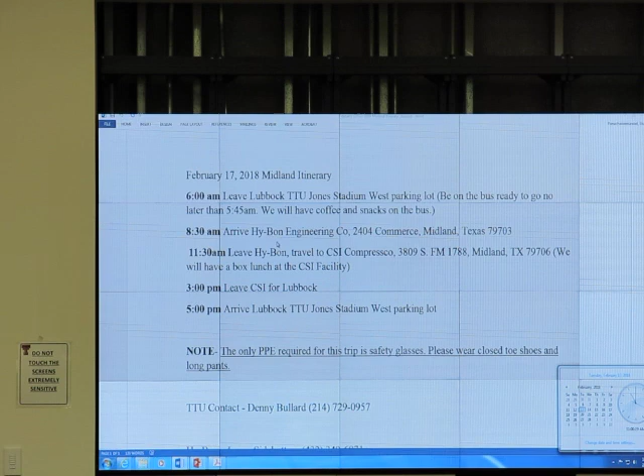Okay, field trip schedule. This coming Saturday at 6 a.m., leave Lubbock from TTU Jones Stadium West parking lot. Be on the bus, ready to go, no later than 5:45. We will have coffee and snacks on the bus.

8:30, arrive at Hy-Bon and have fun for a while. 11:30, leave Hy-Bon, go to CSI. When we reach CSI, we will have...

Mr. Bullard, what is the lunch over there? What do you have, pizza or what? They're Jason's Deli box lunches. And we have a veggie option, right? Vegetarian option. We'll have 3 or 4 options when we get there.

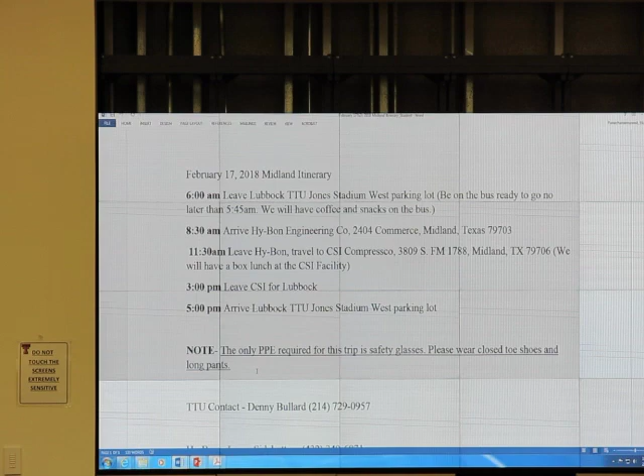And then anyone requiring special dietary needs, I think we will have enough for you. We leave at 3 and arrive at 5. PPE required: safety glasses, closed toe shoes, and long pants. No shorts, and bring your jacket, it can be cold.

If you have any problem, that's a phone number. Question.

Who drives by themselves to that place, or does everyone go with the bus? Then what is our policy on that? We provide a map later on Thursday, but no one should drive by themselves, though some can. Yes, I've had one person ask to drive by himself. We prefer you ride the bus, but if you have extenuating reasons that are really good, solid reasons, talk to me after class.

But we prefer you ride the bus, and you need to be there early. At 6 o'clock we leave. And if we leave and you're not on the bus...

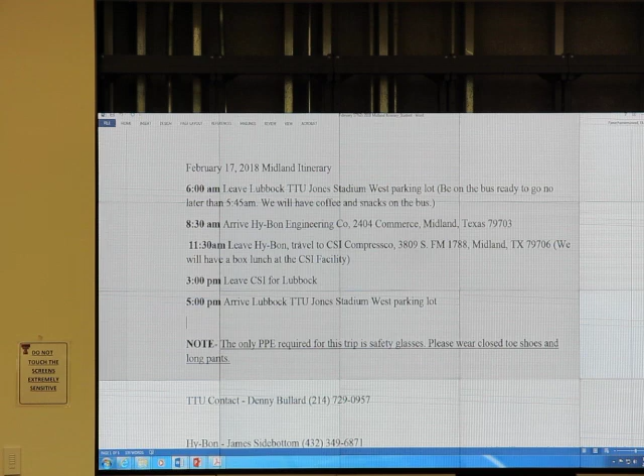Will you drive by yourself or go with the bus for this Saturday trip? I go with the bus. With the bus, okay.

In another class, there were 5 grad students who drove by themselves to Midland for the field trip, but in that course the total number of students was less than 10 people. When they drove, there was a dead deer on the road, and they ran over it. They almost died or something. So for this trip, go with the bus, okay?

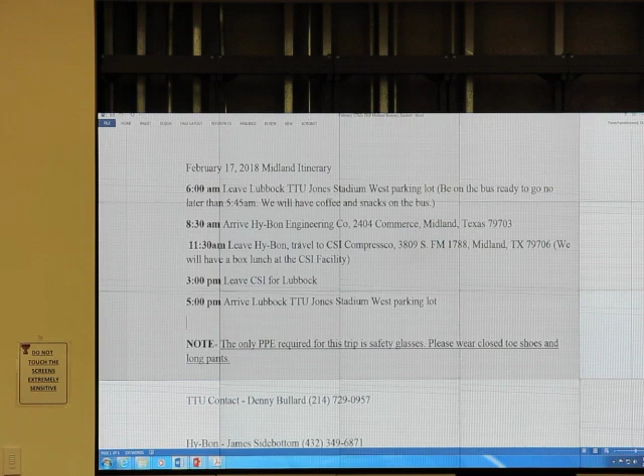And for the missing with university excuse, you... only for field trip. The rest, if you don't have university excuse, you are not allowed to submit the report, okay?

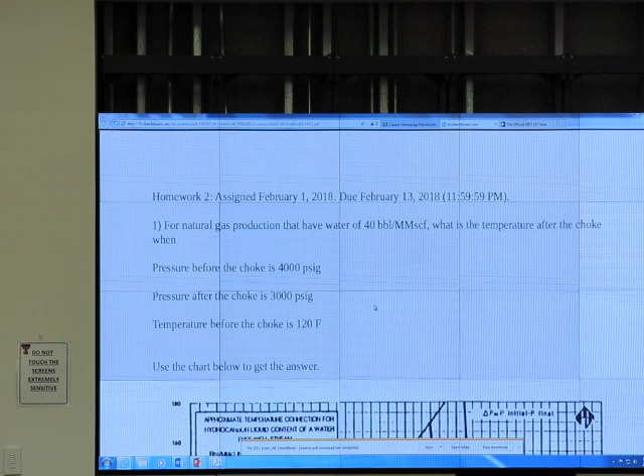And okay, today we are going to go through a little bit of homework, last year's exam, and then we finish a separator and move on.

This coming Thursday, bring a calculator. I announced that on the blackboard, right? Bring a calculator. It is more likely than not that we will have a quiz. We may not have a quiz, but if we have one and you don't have a calculator, that's a problem. Okay?

It is likely that we have a quiz this coming Thursday, and I will tell you the quiz content in a bit. Homework - who hasn't finished it yet? How many of you?

Hasn't finished it. Who finished it already? Okay, so to be fair for those who finished it already, I never extend any deadline, and to be fair to students from last year, I don't extend the deadline.

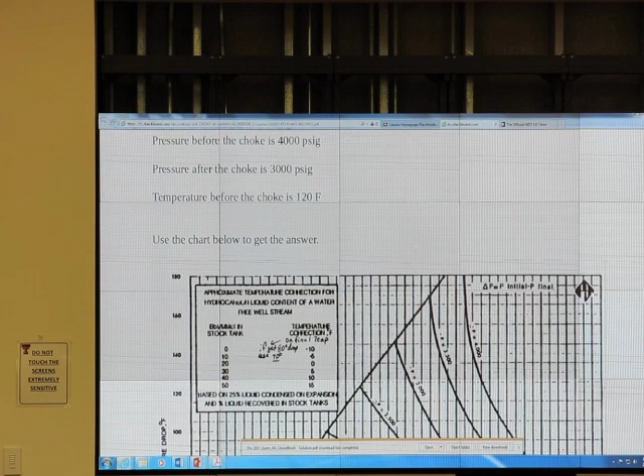I'm well aware that tomorrow is a job fair, and you'll be ready for that. And if you have an interview, bring me a university excuse letter. You can excuse yourself from class, but you submit a report to substitute for that. Good? Okay.

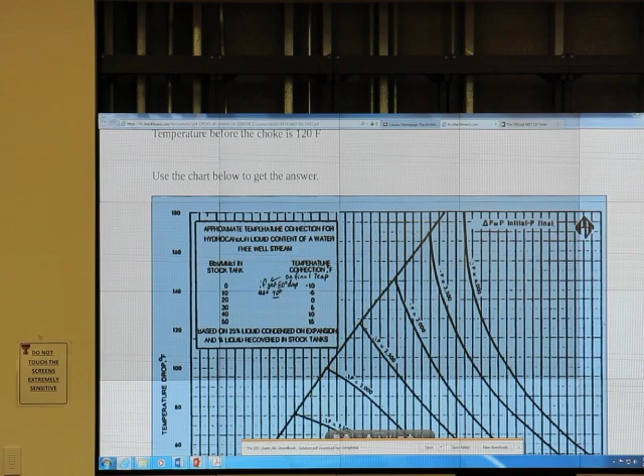One of the homework problems that you may have trouble with - okay, that's homework 2. Homework.

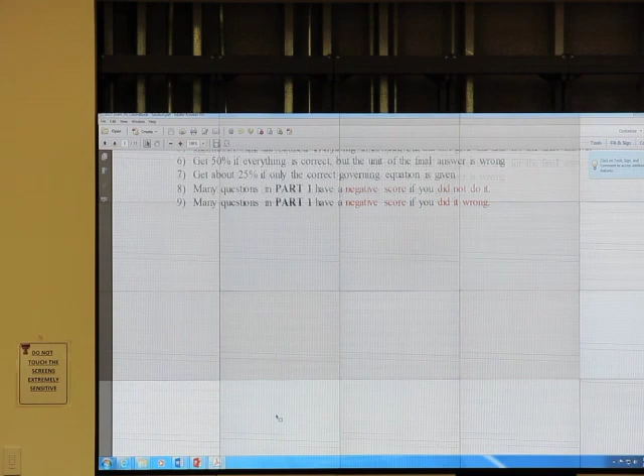Let's go over the exam - last year's exam. Last time I uploaded this. Who hasn't downloaded it yet? It comes with the solution, and I was able to find the solution for 2017. Has everyone downloaded it? Yes. And you can read it all you want.

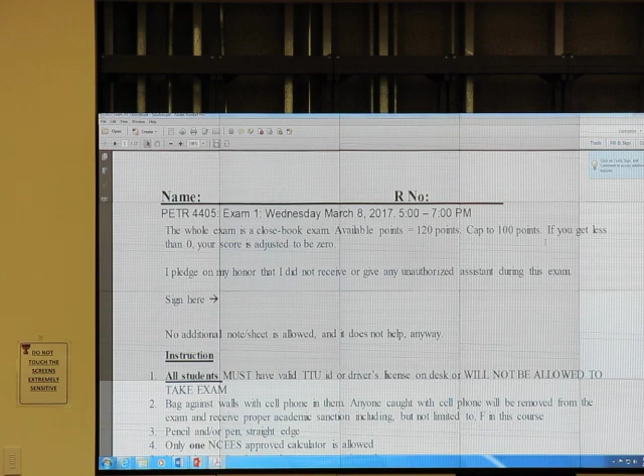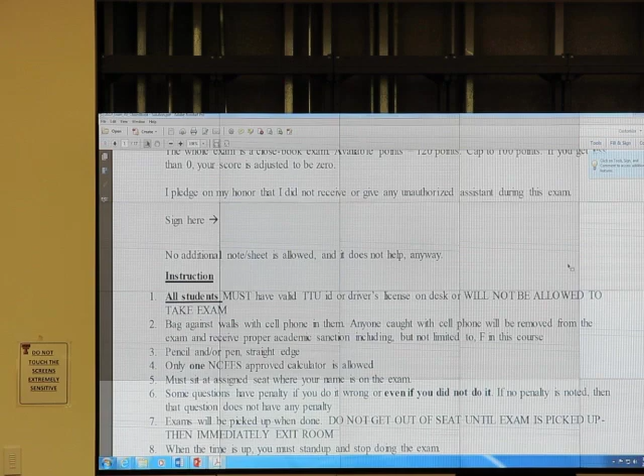Okay, I'm not afraid of it. The new exam should be new, but if it's the same, and it will be new, I will do it - I will do the new one. But if it's the same, you cannot say, hey, the students from this country have more benefit because they have the old exam. Everyone has the old exam, alright, plus the solution.

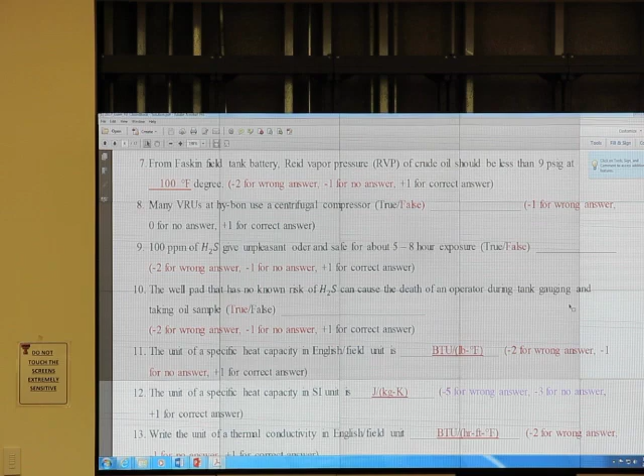Try to do it, okay, to prepare for the exam. There are true/false questions, and separate questions like that. Go through it, okay? And there are calculation questions - I put 3 calculation questions, and this one comes with a solution.

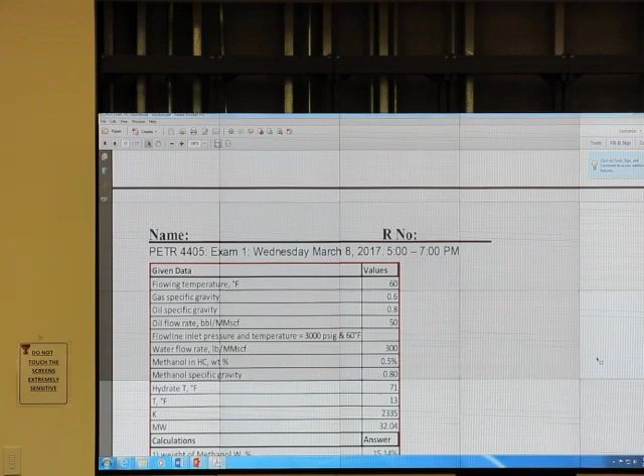If you have a problem, come to office hours with the TA. You know the office hour time, right? Arya Shadi will sit in the TA room upstairs behind the main office. Okay? That's the old exam.

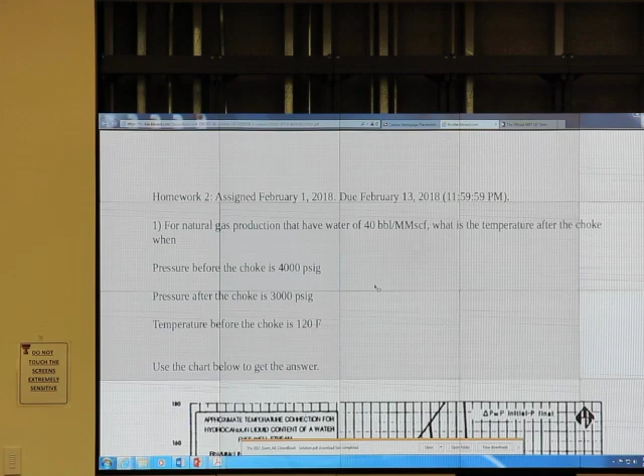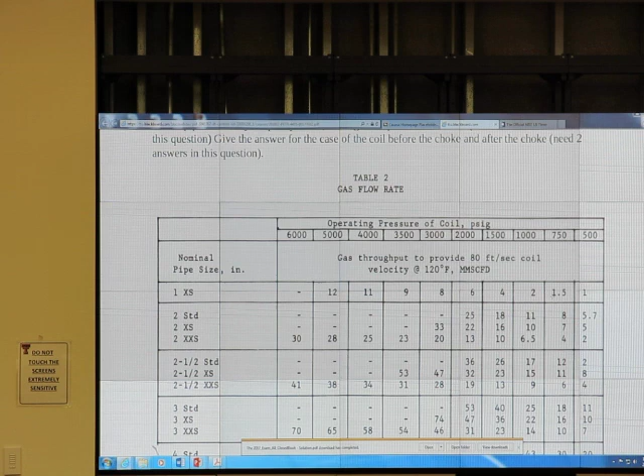Homework 2, question 1, everyone can do that. The one that may not be quite clear is this gas flow rate table. When I do it, I get 13. For the case I selected earlier, I use 2-inch double X. You may use something else. The question here is, this table is for a specific case.

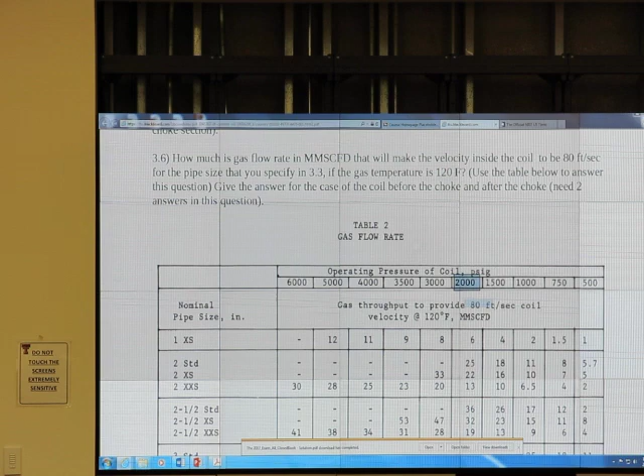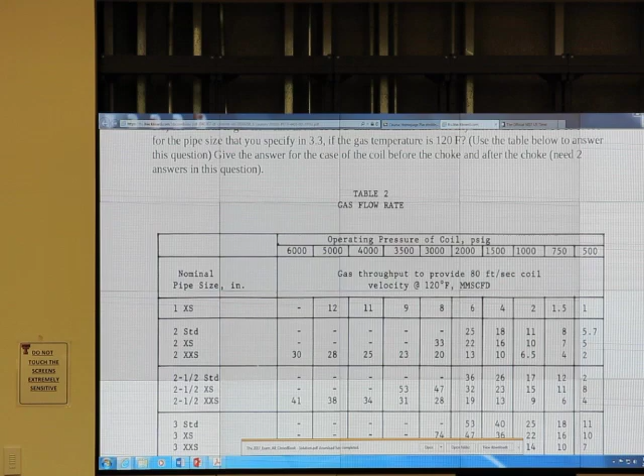This is at 120 Fahrenheit, and the gas throughput is in mmSCFD, so that 13 mmSCFD will make the flow at 2000 psi be 80 feet per second. But if you have 80 F, this number won't remain the same. It will be something else.

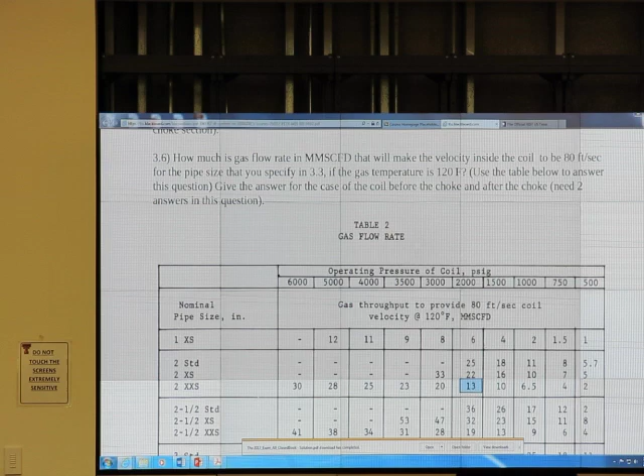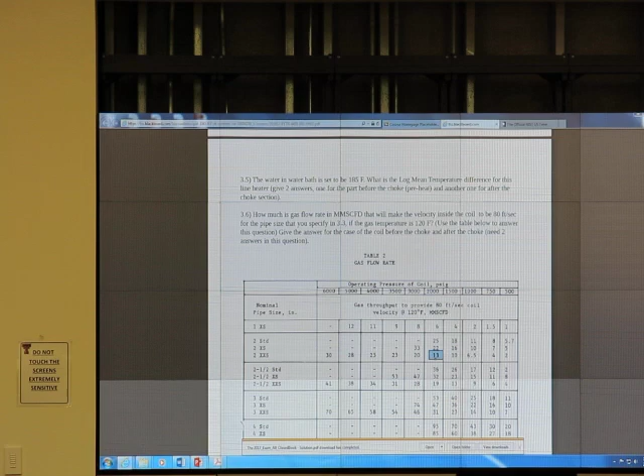If you use the formula given and you use the table, you don't get the same number. I don't think you get the same number. The value from the formula is more accurate, but the table has some assumptions in it. I want you to know it's not the same, it's just not the same. So this is the gas throughput to provide 80 feet per second at 120 F.

It's hot. For the size of 2-inch double X, I can have 13. If the temperature is lower, say instead of 120 it's like 60, what happens? Can I flow more than 13 million standard cubic feet per day in that pipe, or just the same amount?

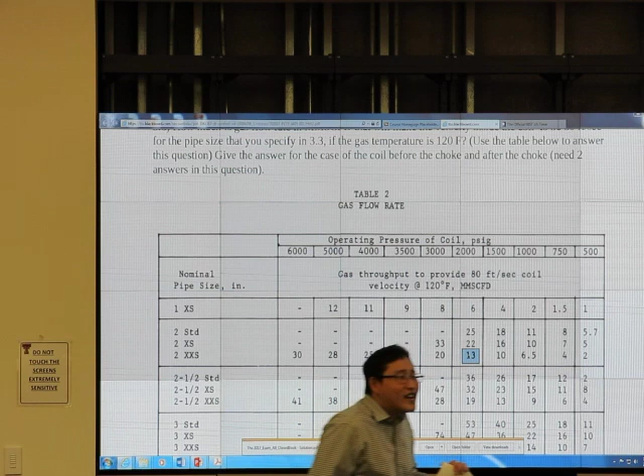More or less? More? Why is that? Because when the temperature is lower... temperature goes down and then? No, it flows less? No, because temperature is lower... so does it flow less, more than 13, or less than 13? Less than 13?

So if 13 makes 80 feet per second at 120 Fahrenheit, if it's just 60 Fahrenheit, can it flow more in the pipe or should it flow less? It should be more. More than 13 or less than 13? More than that, okay, more than 13.

When it is 60, the gas shrinks, right? Gas shrinks. So when gas shrinks, this means you can put more in the pipe so it has the same velocity. To achieve the same 80 feet per second, when gas shrinks already, we should put more gas into it. It depends on how much it shrinks. If it shrinks by 50%, so the volume decreases by half, then you can do 26, right?

Simon, you like 26? If it shrinks by half or something, yes. So if the gas shrinks by half, the volume occupied is just half, then we can put more than 13 mmSCFD. mmSCFD is the volume flow rate at standard condition, it is equivalent to mass flow rate, not quite volume flow rate. Basically one value of mmSCFD gives one value of mass flow rate because it's a volume flow rate defined at standard condition.

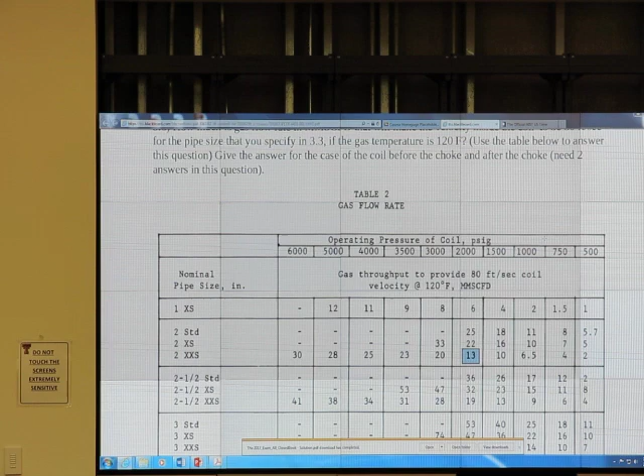Simon, are you good with this? Have you done this question yet? No, that's what I'm doing. Oh, that's what you're doing, okay.

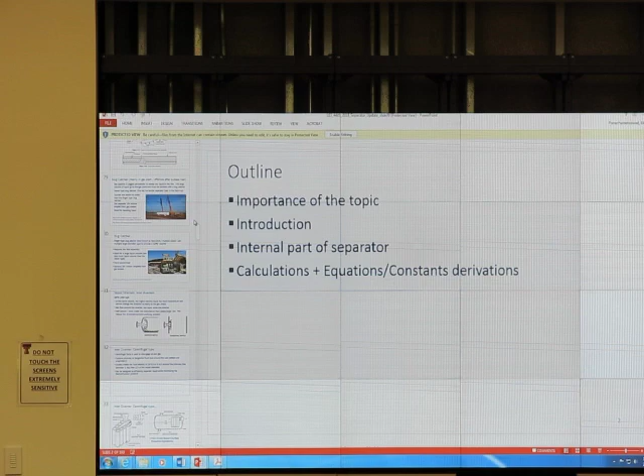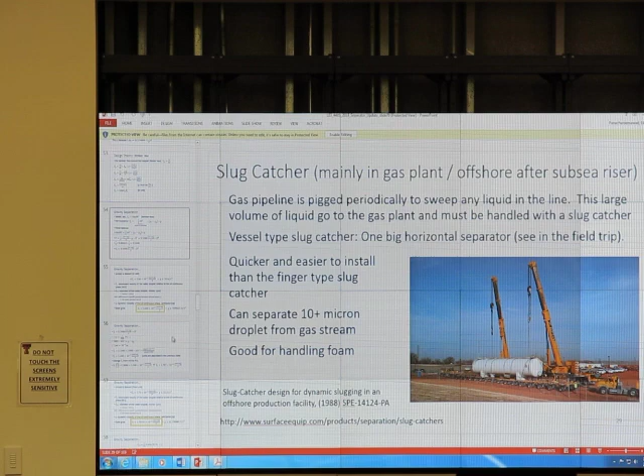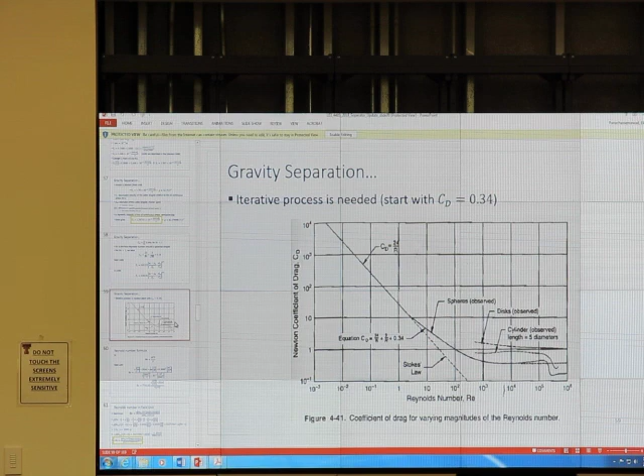Alright, separator. We went over the internal part of the separator, a big separator, slug catcher, a little calculation on the Souders-Brown equation, and VT, the terminal velocity calculation. We went over this.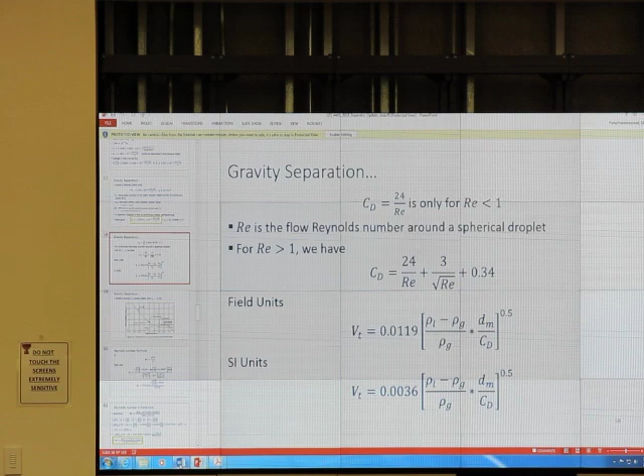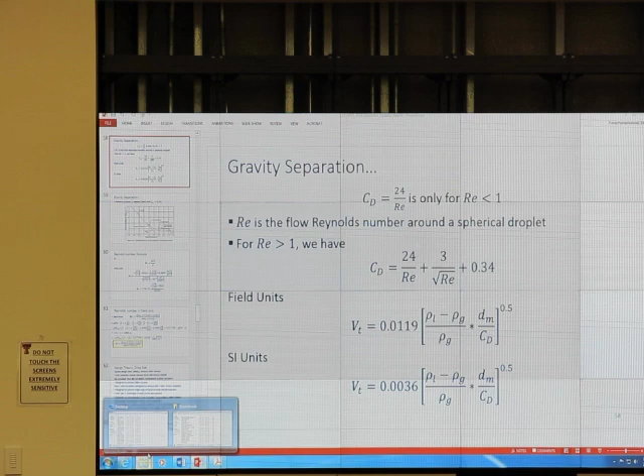In the new homework, you see these two equations. I asked you to derive something, and you will know it for sure because in the homework you're asked to derive some of this constant. That is in the new homework. If you cannot do it, you may come see me.

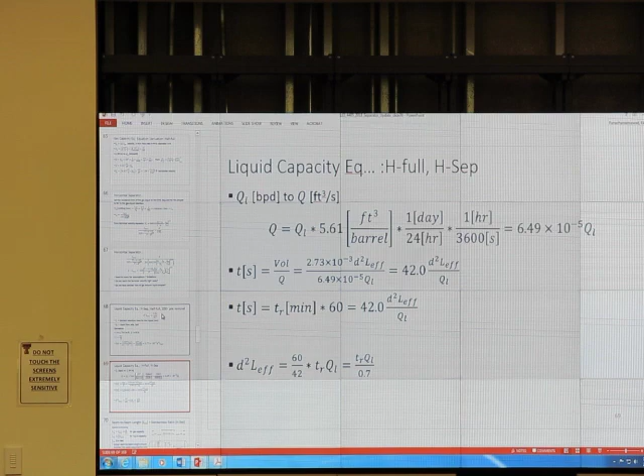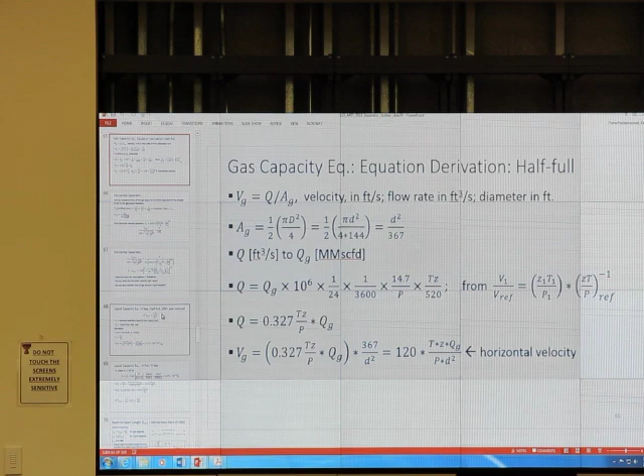The part we haven't done anything about is sizing the separator. I already told you the chart is available, and the reason we don't use the chart is it's just 10% of the time that we don't use the chart. Let's start the calculation.

This slide is about retention time and re-entrainment, which we already went over.

Demi, something, what's your name? Demi what? Yes, you, right hand. Yes, oh me? Yes, yeah, Demi. What's the name of the person next to you? What's his name? Hamza. What? Yeah, what's your name? Hamza. Hamza? Yeah, I will memorize the name.

Hamza, what is the retention time? 30 seconds. No, what is the definition of retention time? Wait a minute. What is the definition of retention time? Average time of a molecule or gas.

So everyone should know the retention time by now, right? So next one we will do the calculation of horizontal separator.

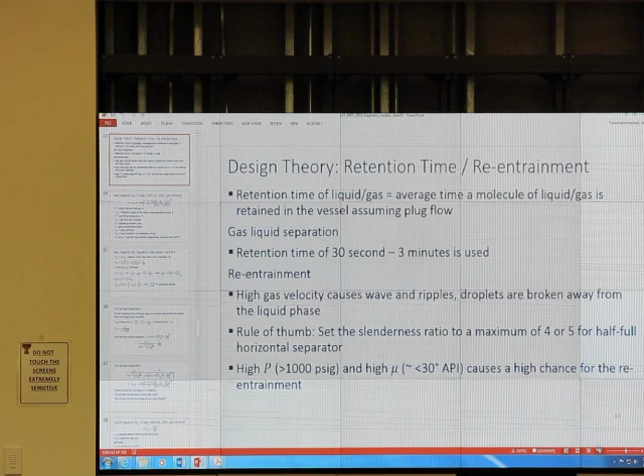And for more information, you buy this book. The calculation is in this book. But for now, I take part of this book and talk about it. Here's the formula for horizontal separator half full.

Okay, the formula is given and we are going to derive it. D is the vessel internal diameter in inch, L effective length, T temperature in Rankine, Q flow rate in mmSCFD, P operating pressure in PSIA, Z compressibility factor, C sub D drag coefficient, D sub M droplet size in micron, and you can read all this, okay?

If we put all this in this unit, we get this equation. You don't memorize the equation, it will be given. To use it, we will talk about it a little bit later, but now we will derive it first.

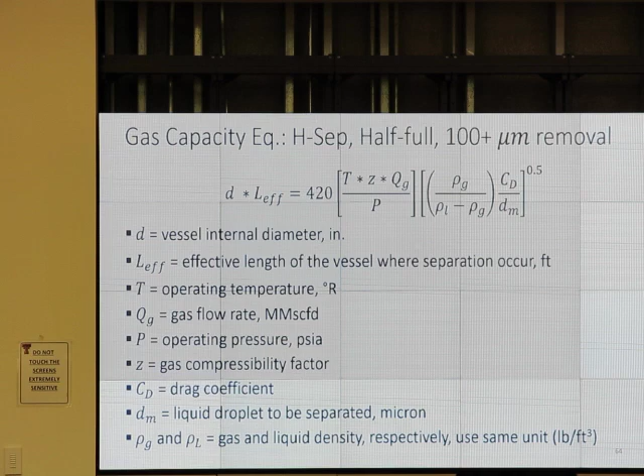Horizontal separator, we derive it based on the concept of retention time that Hamza just answered. Okay, retention time, we use velocity equal to volumetric flow rate divided by cross-section area.

So Q is gas flow rate. If we think about the horizontal separator, from the side view, we have it half full, gas flow on the top. When gas flow on the top, the cross-section area that gas can flow is the top part, right? It's pi d squared over 4 multiplied by 0.5. That's the area for gas to flow.

Flow rate, that is volumetric flow rate, actual volumetric flow rate in the pipe. That is not standard cubic meter. That's not mmSCFD, not standard cubic feet per day. So that's the actual flow rate.

And then we get the actual velocity in the horizontal separator that flows in the top part. So we need to know, when we get this, how fast the molecule will travel horizontally.

Okay, if we have a quiz next time, of course you will need to know the molecular structure of monoethylene glycol, right? MEG. You remember OH, line up, down, up, and then another OH. Got it? That's from the previous lecture. Review it, it is very likely to be on the quiz.

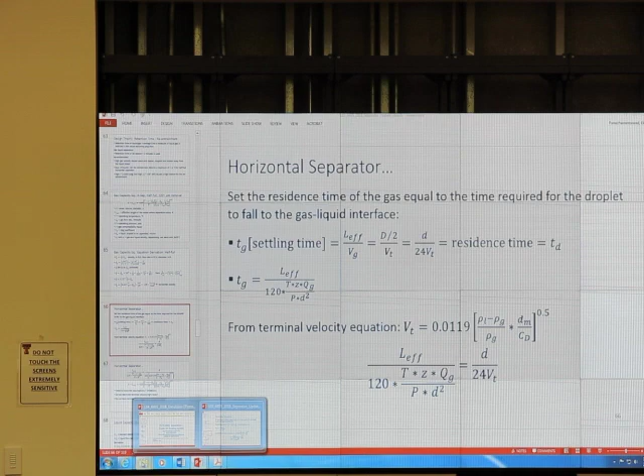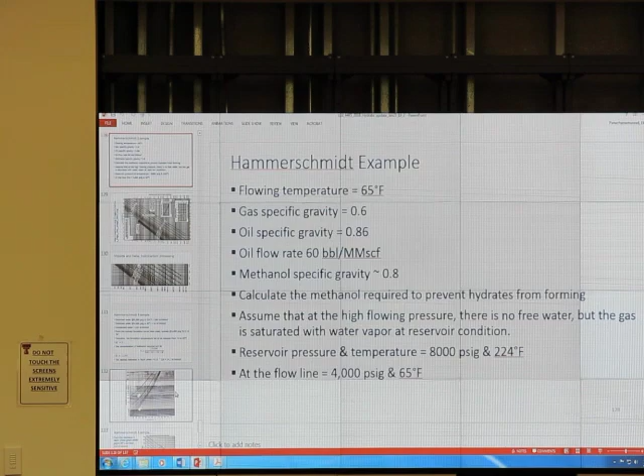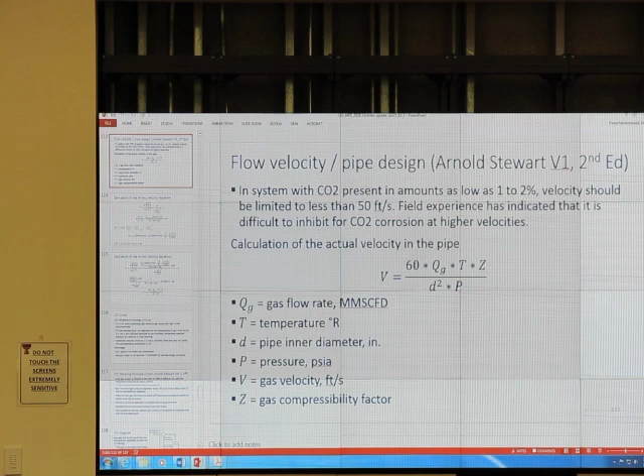I did not print it. When it is a flow in a pipe, when you are asked to calculate the actual velocity of flow in the pipe, the equation is almost the same except the coefficient. Previously it was 60, right? That one was 60, but this time I get 120. Okay, let's show you side by side. That one is 60.

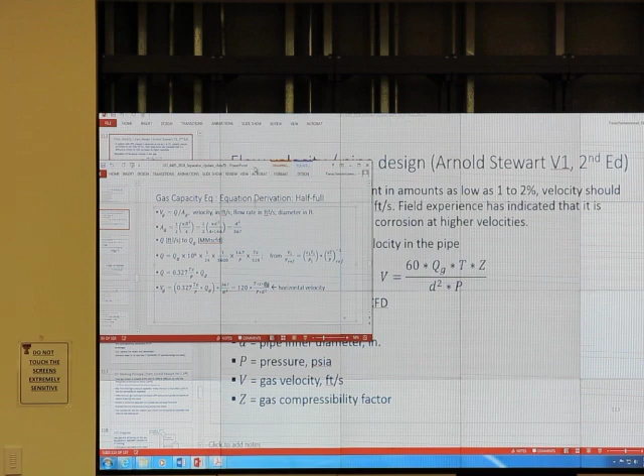And this time I get, that's mine, 120. Okay, 120. Okay, this time I get 120 over there. Why is that? Why do I get 120? Why do I get 120 this time instead of 60? QG the same, right? That's QG and this QG. TZ and that's TZ. D square P, everything the same except the coefficient. Why this time it is 120?

You don't know? Who sits next to you? What's his name? Ahmed. Why is that? You don't know either. And next, what? What's your name again? Next to Ahmed? Kareem. Kareem. What is he looking at? Is that my slide? Yeah.

Oh, okay, very good. So Kareem, why do you have 120? Why? Instead of 60, what happened? So all those three people get F or what? Who can help them? Yes, what's your name, sir?

Because velocity is Q over A, and A is 1/2. A is just half, right? What's your name again? Trent. Is that sound good? Okay, name something, okay, I'll ask you later. So because the area is just half, so we have that.

That's Vg. For horizontal separator, residence time of gas equal to the time required for droplet to fall. This time that for droplet to fall, if it is half full, it will be just half of the pipe diameter. So we have separator, we have half full, the droplet is on the top, the droplet falls, that distance is d over 2, right?

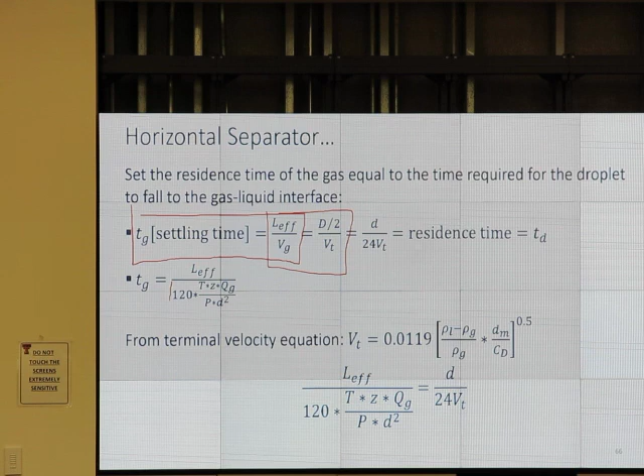So that's why I have this relationship. Good. Okay. tg settling time, I can take the first part. So it's L effective divided by horizontal length divided by horizontal velocity. That is settling time that I have.

From terminal velocity equation, we have Vt equal to something over here. That is the force balance between the net buoyancy and the drag force. And in the homework, you are asked to derive that, okay? Which is just follow my slide and put the number on.

So when we substitute everything, d over 24 Vt is that part, okay? L effective over Vg is this part, okay? Just put it in. Then we put Vt in, okay? Vt, okay, next, and the back, what's your name? Taylor, right? What's your last name? We have so. Martin. Martin.

How do we get this? Where does that equation come from, Taylor? What is 0.0119 multiplied by bracket rho delta rho over rho g? What's that, Taylor? Terminal velocity. Okay, that's good. That's come from previous derivation.

Okay, rearrange it, we get this equation, and this equation is the same as what I showed you early on. Done? Very good. So it's just a force balance. We basically make the time required to travel in the horizontal direction to be the same amount of time that is required to move downward.

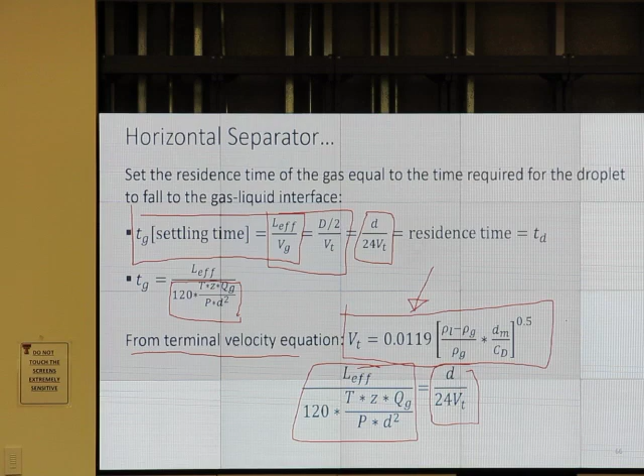Gas in liquid or liquid in gas? We are doing gas capacity calculation. We have the separator on the side, and we have a droplet of liquid falling through the gas medium.

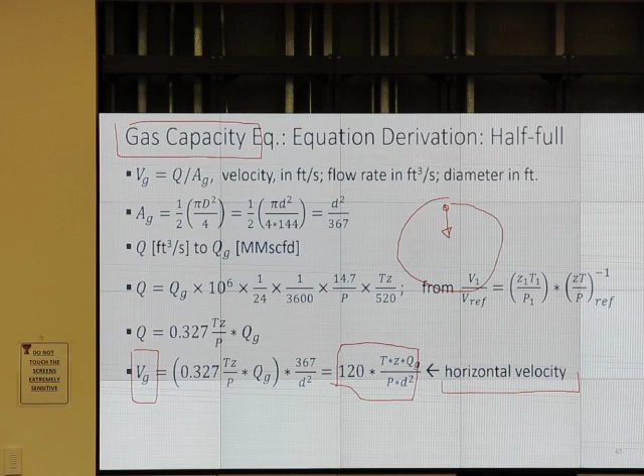So d sub m is the droplet size of the liquid droplet. When we calculate c sub d, that requires the Reynolds number, rho V d over mu. But that mu will be the viscosity of the medium, which is gas. Viscosity of gas, that's for c sub d.

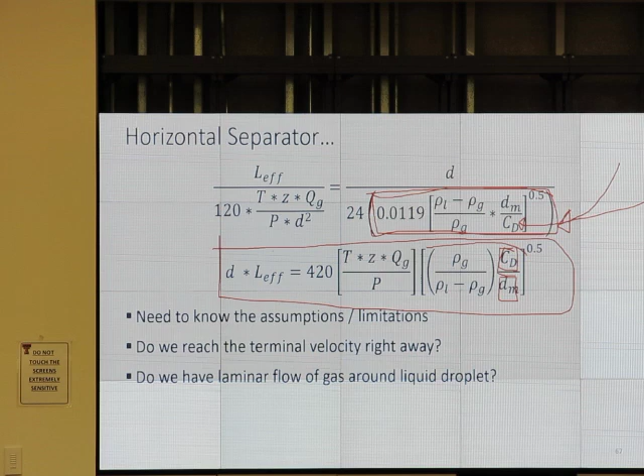Make sense? This is to calculate the terminal velocity. Terminal velocity requires CD, or 24 over Reynolds number, and Reynolds number is calculated based on the viscosity of the medium. Okay, you have this equation. I won't tell you how to use it.

Let's do liquid capacity. Previously we did the gas phase, right? For the liquid phase, we just use retention time, the retention time concept. With some derivation, I get that equation.

L effective is the horizontal length. TR, what's TR? Retention time. QL, liquid flow rate, barrel. Liquid flow rate, I think that's barrel per day. Did I put barrel per day? Yes, liquid flow rate, that's barrel per day.

Time in seconds, volume is... to derive that equation, I get retention time equal to volume divided by volumetric flow rate. In the lab, I didn't use volume divided by volumetric flow rate directly. I calculated the average velocity first, then I calculated the time required to move horizontally. But it's the same as that.

So if it's half full, when it's half full, that's the volume on the top, and on the bottom we have the liquid part. That is the volume of the liquid part. Q is the volume of liquid flow rate. So the time required for the liquid molecule to stay in the separator is the volume of liquid in the separator divided by the volumetric flow rate.

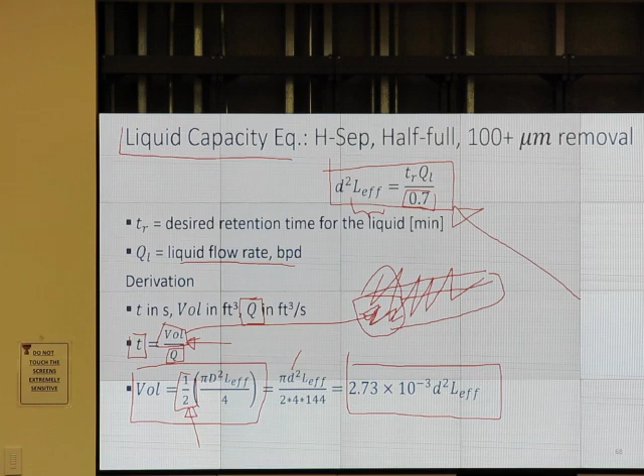You want to separate water from oil, right? We have a liquid phase, which is a mixture of water and oil. Free water knockout doesn't separate gas; we have to separate gas out first. So free water knockout operates very full, like this full, so that we have a lot of volume to do the separation. Make sense to you, senior? So if we operate at just 10% full, we don't have enough volume. There's no point buying a big separator. So we buy a big separator and we have to operate it correctly.

For free water knockout, we fill it more than half, almost full, so we have just a small area for the gas. If I look at it from the side view, we don't have much cross-sectional area for the gas phase, right? Just a little bit of gas phase.

This means gas will travel very fast, and we don't have much retention time for the gas phase, but we have a lot of retention time for the liquid phase. That's the key. Based on this derivation, retention time is volume divided by flow rate. If volume is big, the free water knockout can accumulate larger volume and handle larger volumetric flow rate, larger Q. So if we have more volume, we can have more volumetric flow rate coming in.

If we operate the free water knockout at 10%, this means we don't have much volume for water to separate out. Then even though our separator is very big, the retention time is not much. Retention time is the actual volume occupied by the liquid phase divided by the volumetric flow rate coming in.

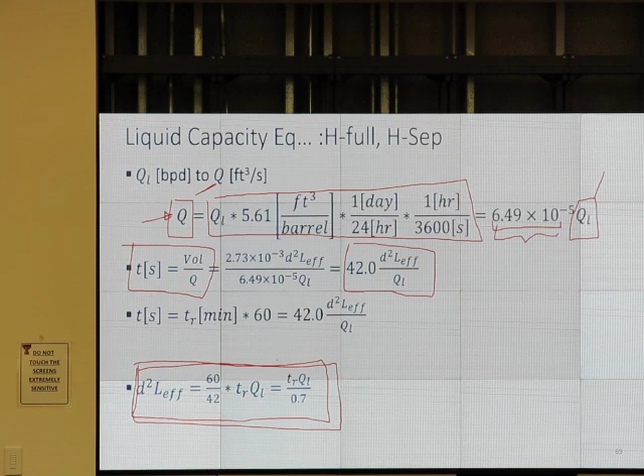How do we select it? So we have one equation for liquid capacity and one equation for gas capacity. The next part I'd like to talk about is the seam-to-seam length, L sub SS.

If I have a liquid droplet in a gas stream at the top, it falls down, moves, and reaches the liquid level. It requires L-effective length—that much length. That is L-effective from the gas capacity equation.

For the oil capacity equation, L-effective is the length required to have that T sub R retention time. We have T sub R retention time and we have L-effective. So with that L-effective, if the separator is long enough, we can have that much retention time.

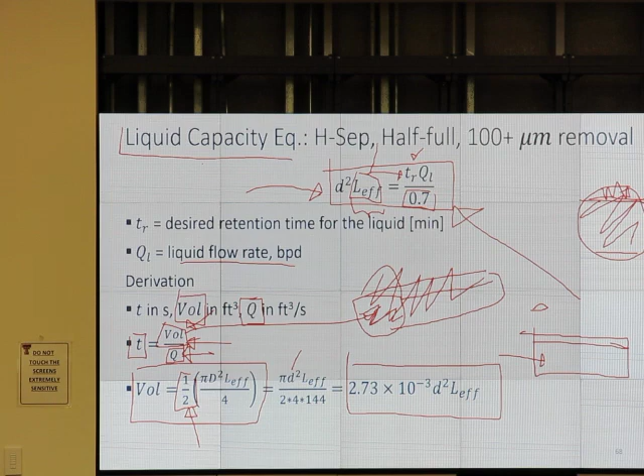So L-effective from liquid capacity and L-effective from gas capacity are not the same when you calculate them, but when you look at the separator, there's only one seam-to-seam length. We don't have a separator that looks like this on top and that on the bottom—it doesn't make sense. So what do we do?

We want to deal with this. First step, we need to know the seam-to-seam length. Seam-to-seam length can be calculated by two ways. This slide I updated a little—I added some words that won't appear if you print it out.

L-effective plus D over 12, that's for gas capacity. Seam-to-seam length equals 4 over 3 multiplied by L-effective, that's for liquid capacity. Seam-to-seam length is in feet. So if I have L-effective for the liquid from the liquid capacity equation, I can get the seam-to-seam length for the liquid part. If I have L-effective from the gas capacity equation, I get the seam-to-seam length for the gas capacity part.

Select whichever is larger. Got it? Select whichever is larger.

Then we have to calculate the slenderness ratio. Slenderness ratio is the length over the diameter of the cylinder. It should be between 3 to 4. The equation for slenderness ratio is L-SS over D over 12, where D is in inches, so D over 12 is the diameter in feet.

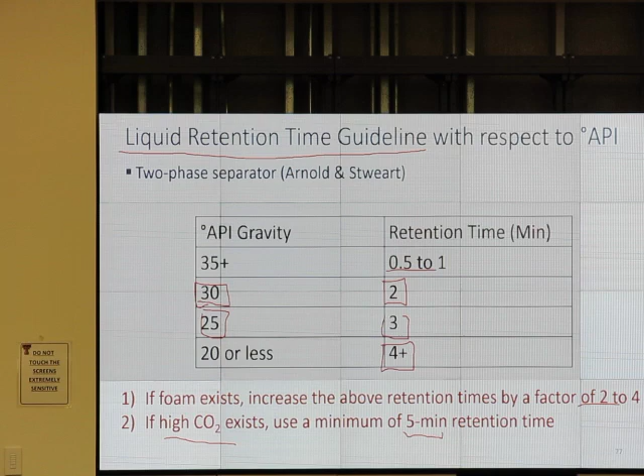If we have foam, multiply by 2. If we have carbon dioxide, use at least 5 minutes. That's a guideline.

When we do this sizing, we may have 3 minutes maybe enough, or maybe it is 4 minutes. It depends on what kind of oil. If we know for sure it is API gravity of 20, we may just use one number. But if we don't know, it may be API gravity of 25 or maybe 20, so I have two numbers, 3 or 4 minutes. So for each case, I can have several possible diameters: 24, 30, 36, or 42. For 4 minute retention time, I may have 24, 30, 36.

The first column is retention time, second column is the diameter. We list the possible cases, do the calculation, and select the one that looks good. We list the possible retention time, it may be just one, and we list the possible size. They don't sell every size, we don't have 25.1, 2, 3, 4.

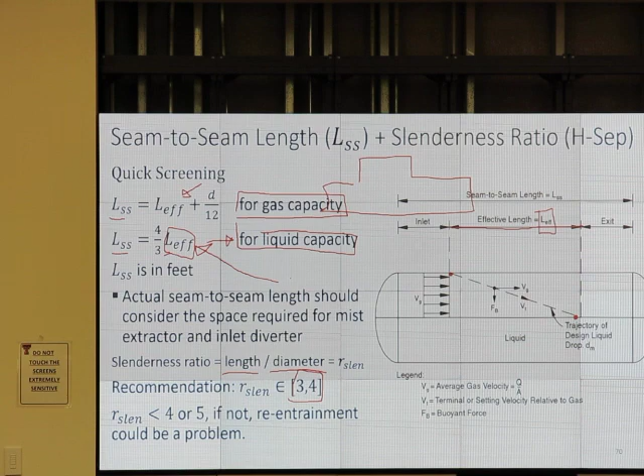For the liquid part, I put retention time, flow rate divided by 0.7, I specify the D, and I can get L effective. So I get L effective from both. In each case, based on the L effective, I can calculate seam to seam length. For the gas equation I use the top one, for liquid I use the bottom one. So I have seam to seam length, then I select whichever is larger.

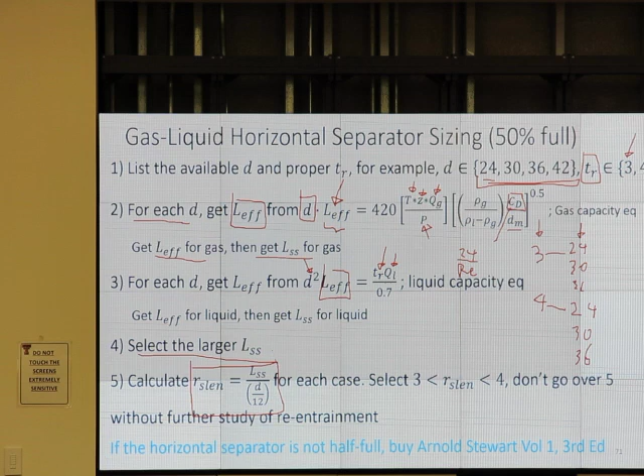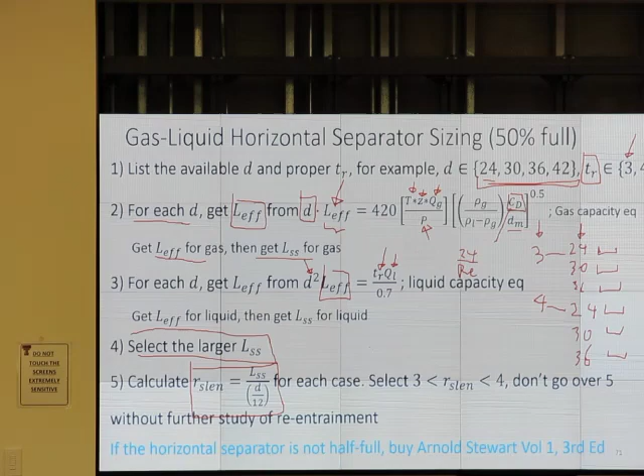So for the case of 24 inches, I have seam to seam length equal to something; for 30, seam to seam length equal to something; for 36, seam to seam length, and so on. Of course, you have to do this in Excel. Then we calculate the slenderness ratio: we already know the diameter, so seam to seam length in feet divided by d over 12 gives us the slenderness ratio. If we have several kinds of ratio, select the one that is between 3 and 4. Done.